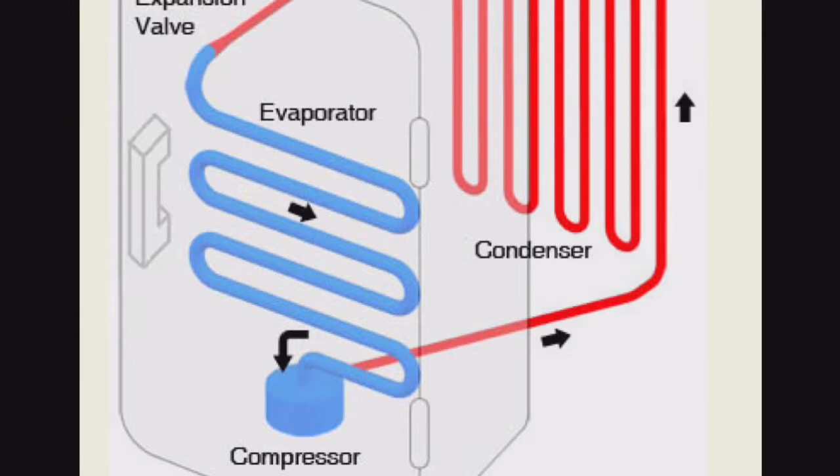So what you should first know is that there is a refrigerant liquid inside a refrigerator. It oftentimes takes on both gas and liquid states of matter inside the refrigerator, okay? So coursing through our refrigerator is the refrigerant. We will just call it R-134a.

Now, there are different refrigerants, and some refrigerators use different ones. This is a refrigerant that they use, and the air conditioner in your car uses a very similar cycle. Your air conditioner in your car has to have a compressor, an evaporator, an expansion valve, and a condenser. This is what is required for any sort of cooling process.

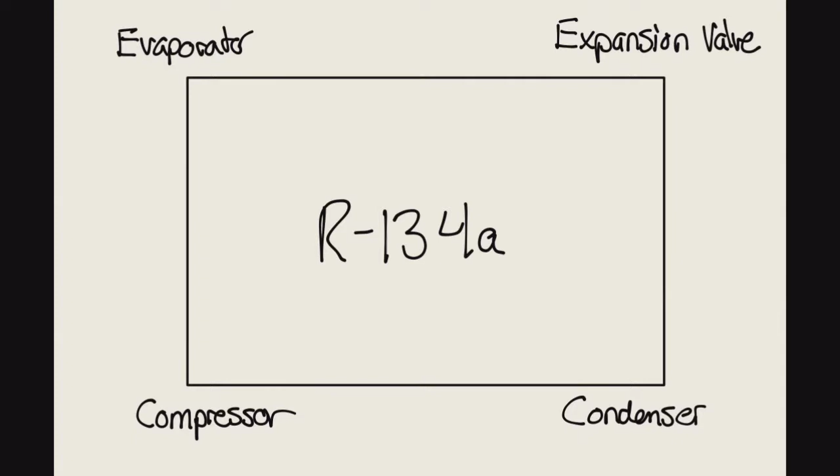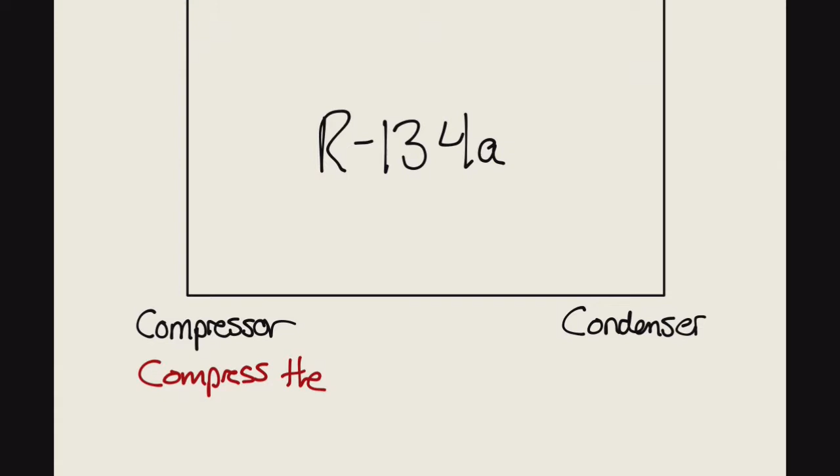Okay? So first thing we do is we compress the liquid at the compressor. At the compressor, and this may seem kind of silly, but let's write it anyway, we compress the refrigerant.

A compressor. There is. Yep. It's usually, just so you know, inside like the dashboard or just at the back of the engine, right on what they would call the firewall. Right.

The compressor is pretty sensitive. When you move a refrigerator, like that refrigerator back there, you mix up the refrigerant inside the compressor. So you're supposed to let them sit for a period of time before you turn them back on. If any of you ever have to move a refrigerator, if you have to move it upstairs or it bounces around a lot or you don't move it smoothly, you're supposed to wait like an hour before plugging it in to let everything settle and make sure everything is okay inside the refrigerant system.

So we have a compressor and we compress the refrigerant, okay? This is done using electrical energy, so that's why we plug our refrigerator in. Our refrigerator is literally plugged into the wall so that we can use the compressor. And if you look at the back of the refrigerator, I'll pull it out a little bit. I think we should be able to see it.

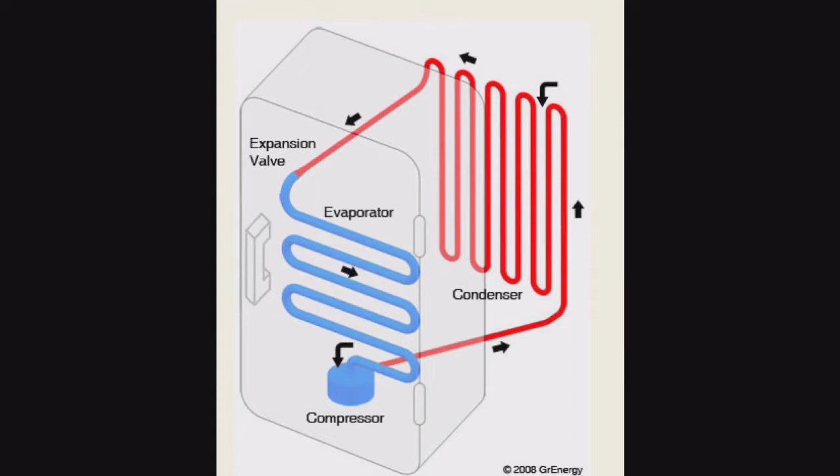So let me draw your attention back to our diagram here. Let's look at what happens here. Sorry. The compressor sends the liquid to the condenser. All right, so we compressed it. It's now dense. We send it to the condenser where it is a liquid. Usually at this stage, it has a lot of heat, hence the reason that it is red.

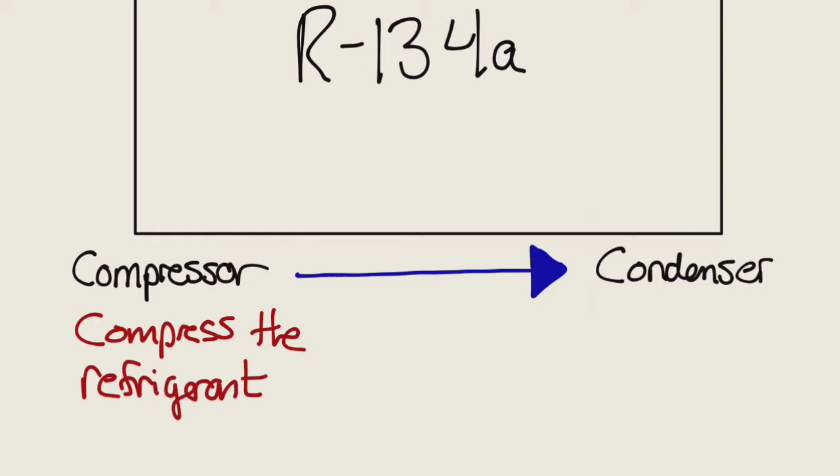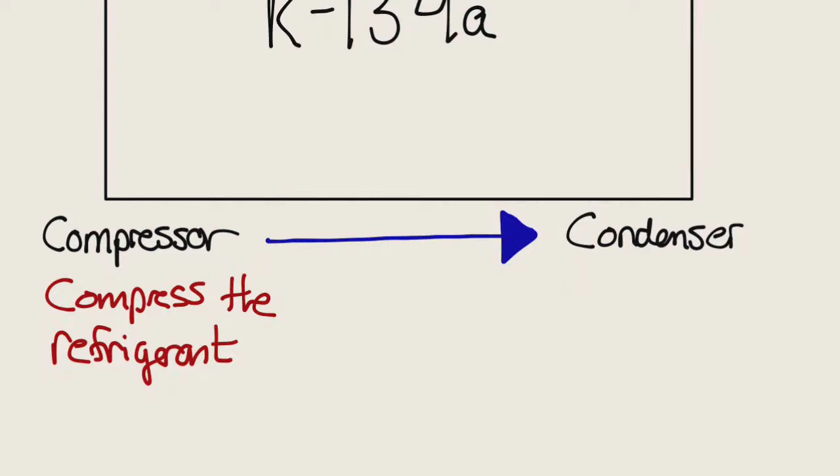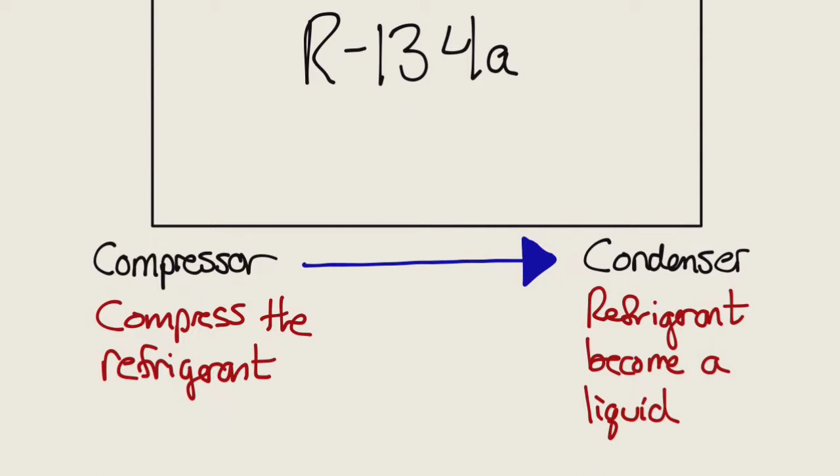So we go from the compressor to the condenser, so let's draw an arrow. And let's draw this down here. We're going to go from the compressor to the condenser. The condenser is a place where the refrigerant becomes a liquid. This is pretty important. The refrigerant becomes a liquid.

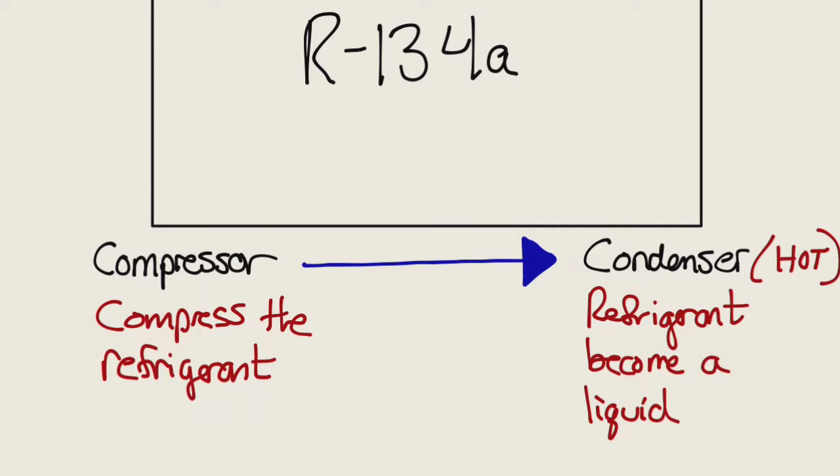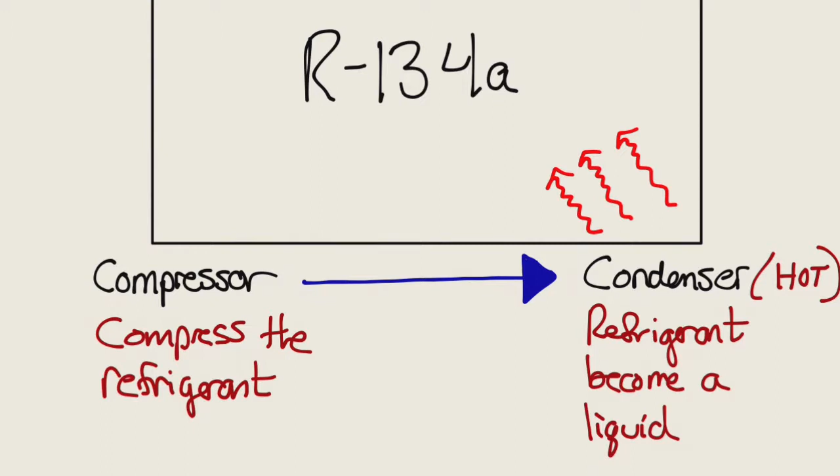And usually during this stage, the condenser is going to be very hot, because at this point, usually the liquid has a lot of energy. It has a lot of heat energy that it's pulled from inside the refrigerator out. So the compressor goes to the condenser, and the condenser is hot, which means that it's going to give off heat energy.

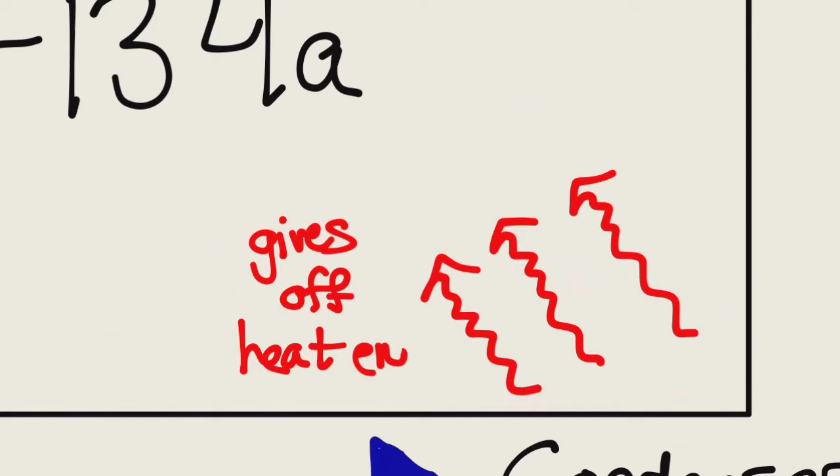So what I also want you to do is on the inside of your rectangle, I want you just to draw some squiggly lines with arrows, and you're going to write gives off heat energy. So if you ever feel the back of a refrigerator, it's usually quite warm, because you have a big condenser.

How many of you have a refrigerator at home that has that big coil on the back of it? The big coil on the back. It kind of looks like it's a big piece of metal. Usually older refrigerators have it. Newer refrigerators now are coming so that they're kind of enclosed so you don't have access to that. We've gotten refrigerators that are quite a bit more efficient than some of the old ones, or even some from 10 years ago.

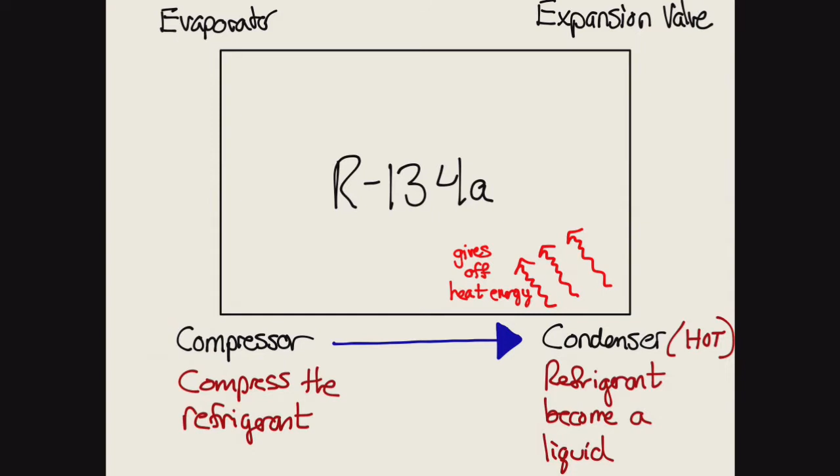All right, so we have a compressor, goes to the condenser. It's hot at this point. It's going to give off heat energy. And then from the condenser, the liquid refrigerant goes through an expansion valve. It's not a valve as in a valve where you turn a knob. This is a valve that takes a liquid and all of a sudden allows it to expand really quickly. What happens here is it goes through drastic cooling.

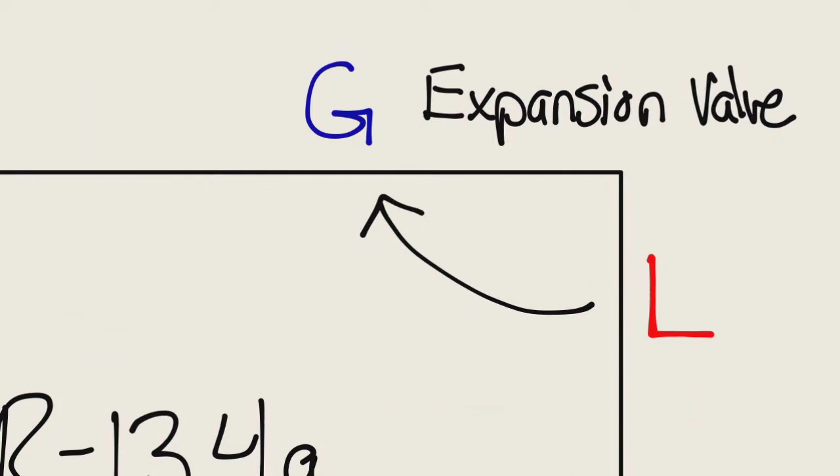Let's draw some information here. First of all, the expansion valve changes the liquid to a gas. So we have a liquid here. What's going to happen is we end up with a very cold gas here. And so what happens when we go from liquid to gas is that there's an expansion and cooling.

Usually it comes into the compressor a gas. It's compressed, put out into the condenser where it becomes a liquid. We'll go through the whole cycle once we're done explaining each piece. But the expansion valve changes it from a relatively warm liquid to a very, very cold gas. Expansion which results in cooling.

How many of you have ever held a CO2 cartridge? How many of you have ever poked a CO2 cartridge and then let it all out very quickly? Has anyone ever done that? Does anyone know what happens to a CO2 cartridge when all the CO2 escapes very quickly? What happens to it? Yeah. The cartridge doesn't necessarily shrink. Yeah. It gets very cold, so much so that it actually forms frost on the outside.

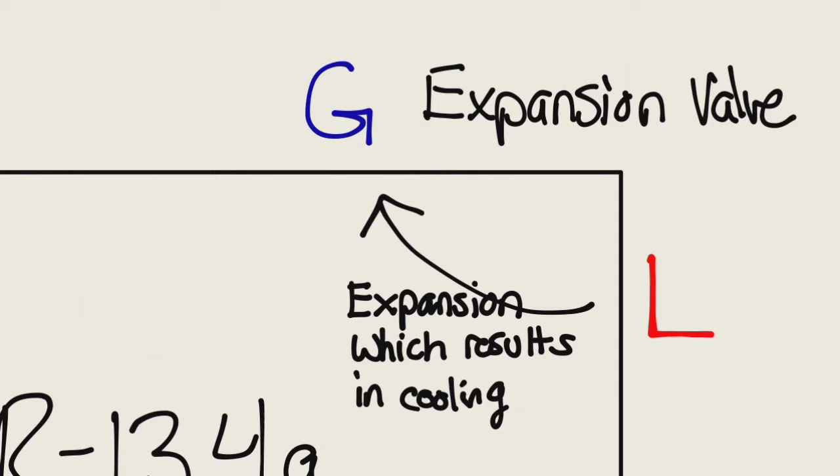Kind of like an air horn. It gets cold on the outside. Yeah, that would be a great example. When you squeeze the air horn, you're letting the gas out. It expands out into the room very quickly. As a result, there's less gas in the horn. It expands and the can gets cold, okay, because there's expansion which is taking place. When gases expand in a space, they usually cool. Okay, so we have this cooling effect.

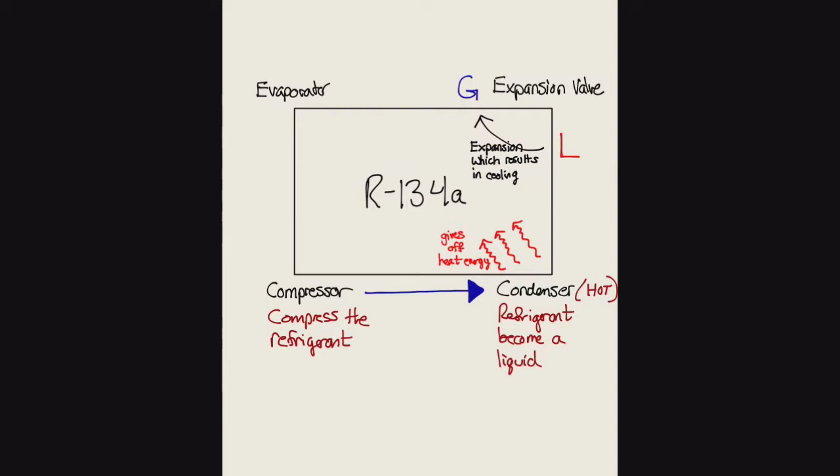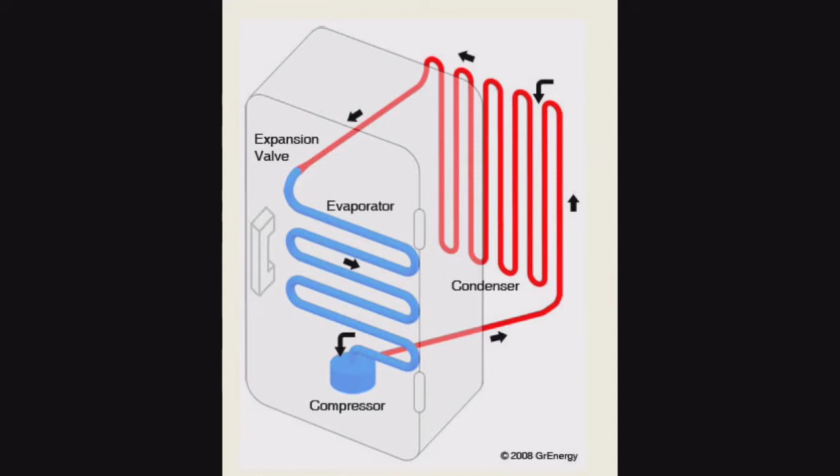Okay, so we started at the compressor. We compressed the refrigerant using electrical energy. That's the reason we plug our refrigerators in. We go to the condenser where it becomes a liquid, but this is where it's giving off lots of heat into the room. Okay, it then goes through an expansion valve which causes the liquid to expand quickly, cool drastically, and then we take it to the evaporator. Okay, and that's where the gas refrigerant is inside your refrigerator.

Okay, the evaporator, you'll notice it's blue in this diagram, is where the coolant goes through the inside of your refrigerator. If you look inside this refrigerator, you'll actually see the evaporator.

Mr. Jackson, we like Domino's.

Ladies and gentlemen, this is like a hose. It is tubing. It is piping. And what's going through it right now is a refrigerant that is in the gas state of matter. What do you mean? Gas. As in like air. No, but like, it's putting in gas or taking out? No, we're not thinking of fuel gas. We're thinking like water vapor, air gas. So there's basically really cold gas particles inside there right now.

So they're like shooting out little things of nitrogen. No, they're not shooting out anything. They're just inside there and they're really cold. That's it. How did they? We pumped them in there. I thought you said it wasn't pumping in. Stop talking. Isabella, we are moving cold gas into this evaporator right here.

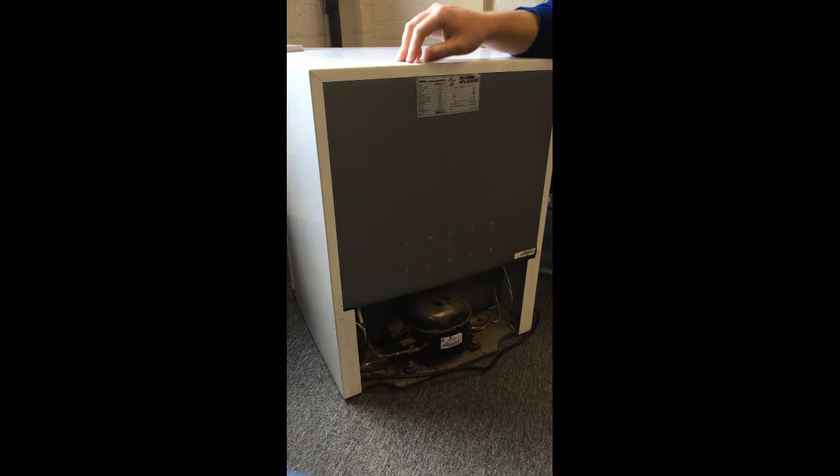And it's just separated by like a little plastic box. Say what? It's just separated by a little plastic wall. Yeah. It needs to be in contact with the air. It's got to make the air very cold by removing energy. It absorbs energy. Then it takes that energy to the compressor. So let's look at the compressor. Is that why like your tires get lower air in the winter? That's a different topic. Okay?

This is different. Okay? So now we have the evaporator inside the refrigerator, and the evaporator is pulling heat energy out. Okay? It's absorbing any energy. So like when I open that door and warmer, more energetic air flowed into the refrigerator, now that air is in there, this refrigerator is working, it's on, to remove the energy I just added and pull it out. Okay, so here's how it does that.

It sends the energy to this device down here called a compressor, which is very hot. Okay? And the top of the refrigerator is very hot. Okay? The compressor turns that really cold gas into liquid. Okay? It turns it into liquid.